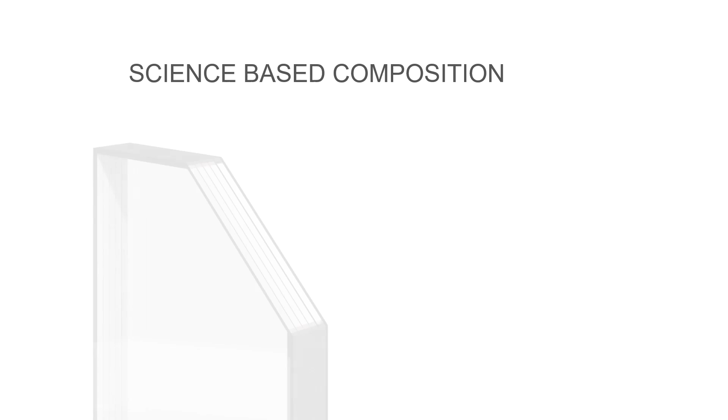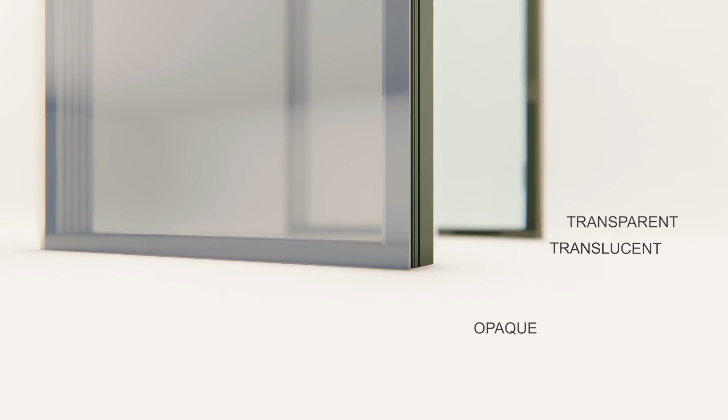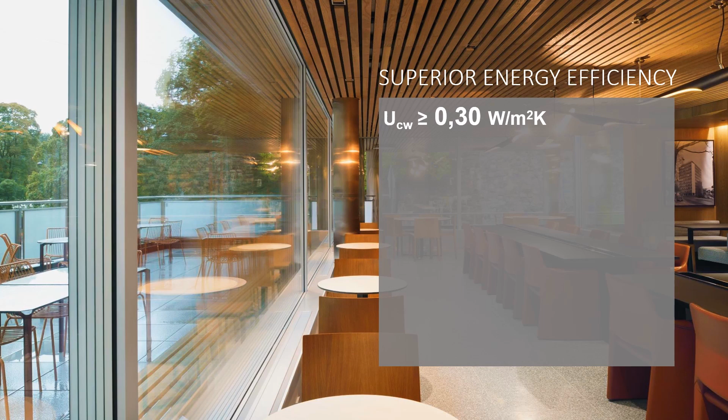Qbiss Air is a unique single-skin glass facade using a multi-chamber insulating system. Up to 6 layers of glass create an innovative insulating core which is available in transparent, translucent and opaque options. A unitized glass curtain wall system requires no exterior sun shadings. Qbiss Air delivers unparalleled energy savings. Specifically, the fully transparent glazed facade offers an extreme level of thermal insulation. Thermal transmittance or U value of curtain wall is as low as 0.30 watts per square meter Kelvin.

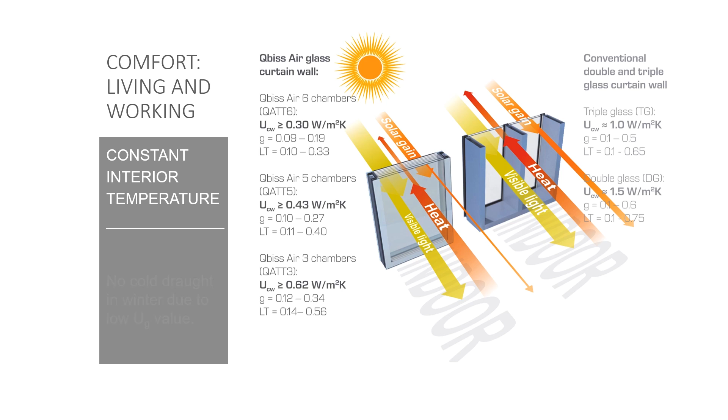It facilitates a constant interior temperature with no cold drafts from the glass in the winter, which is due to low thermal transmittance U value. Equally, in the summer, there is no excessive solar heat gain due to low solar heat gain coefficient. Qbiss Air creates an outstanding living and working environment. Due to no need for exterior sun shadings, there are no viewing obstructions to the external environment. The fully transparent facade maximizes the passage of natural daylight, which contributes to an improved well-being of occupants. Its sound insulating capabilities in excess of 43 decibels ensures a peaceful environment too.

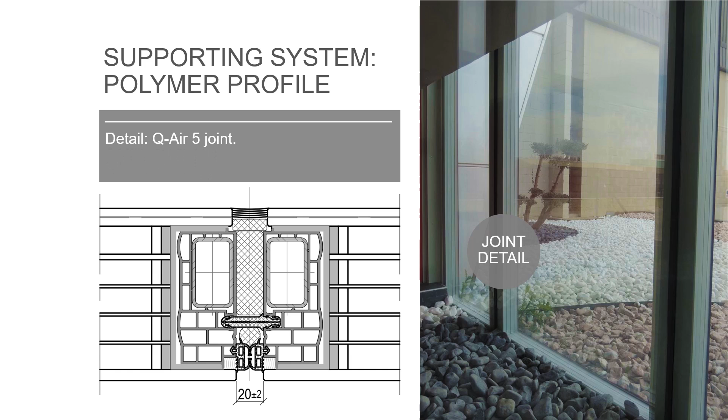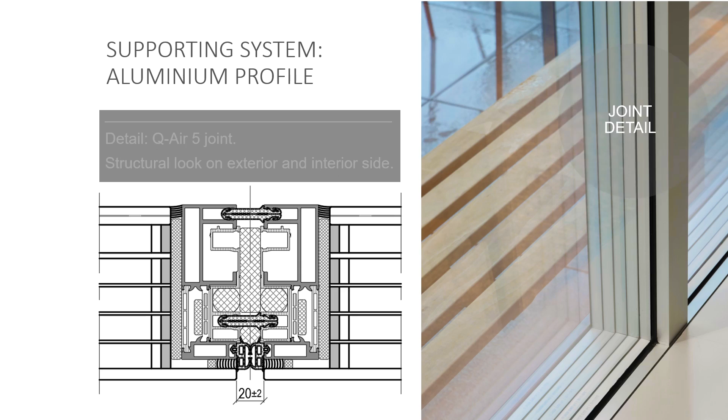Qbiss Air curtain wall offers 2 structural supporting system options, a polymer extrusion profile and an aluminum extrusion profile. Polymer extrusion profile is a perfect choice for achieving the demanding thermal insulation levels for the building envelope. The integrated profile enables flush exterior and interior look. Aluminum extrusion profile, on the other hand, enables different combinations and integrations where transparent, translucent and opaque units can be combined or windows and doors can be integrated into a unit.

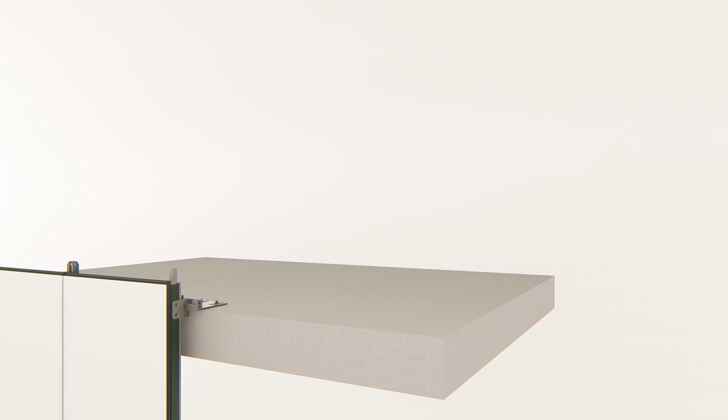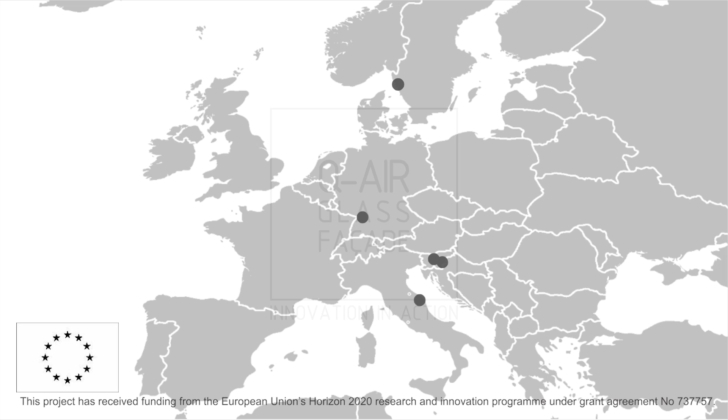Q-Air is designed for fast, clean and efficient floor-to-floor installation. Based on proven modular unitized principles, each unit is installed from inside the building, eliminating the need for external access. For refurbishment projects, Q-Air elements can be installed from the outside of the building in order to assure no interruption to occupants in their daily activities. Due to high level of innovativeness and positive impacts, Q-Air has been selected and supported by the Horizon 2020 program, a fast track to innovation pilot scheme. Q-Air project is implemented by 5 international consortium partners: Trimo and Zag Institute from Slovenia, Kohlbecker from Germany, Cantori from Italy, and Skandinaviska Glass System from Sweden.

At the end, I would like to invite you to our architectural competition, Q-Air Point. Use the Q-Air BIM library to design a pavilion where people can meet, work, or simply chill. Submission deadline is on the 15th of October 2018. You can get more information on www.q-aircompetition.com. Thank you all for watching, and now I give the word to my colleague Mate in Munich to talk more about BIM.

Thank you very much, Mojca, for your nice video. And now let's jump in with the library itself. So we made it with Revit. And first, a little bit of theory. I prepared a few slides for you guys. This is standard information about BIM. That's the life cycle of BIM. I hope you guys are familiar with it. The main goal with this library was to create something not only for the architects, but to try to push the boundaries of these different phases of the life cycle.

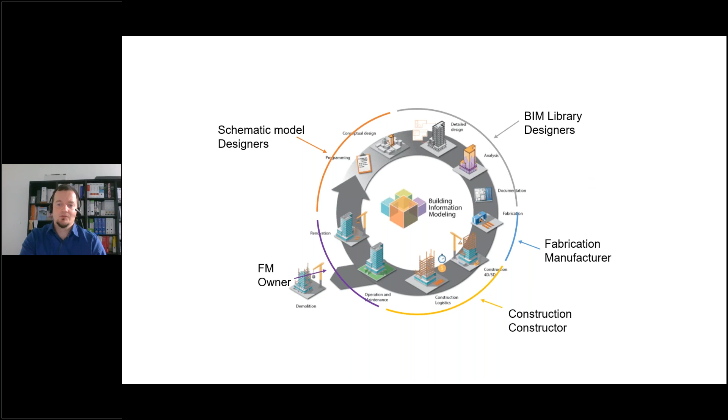In other words, it means a better collaboration between the architects, the manufacturer, construction, and also facility management. The structure of the objects in the library that enables this close collaboration is that we optimized the size of the objects, which means the 3D model is not that detailed. So we kept the performance the highest, so the computer is not going to crash under the 3D models. But we have the details, so you can use also scale 1 to 10.

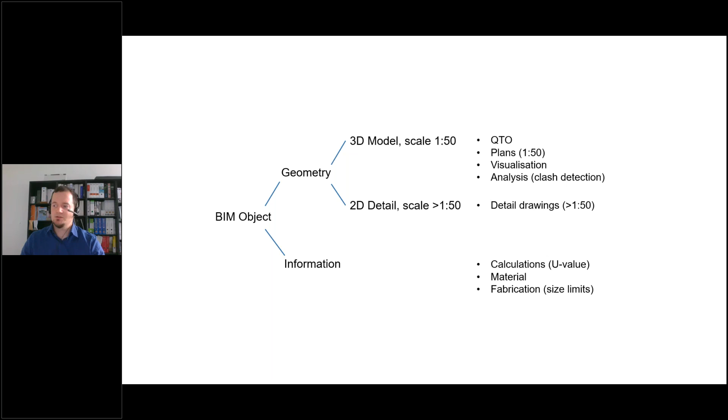But then with a smart solution, we solved to put the 2D details on top of the 3D model. Then, of course, we are talking about BIM objects, so there is added information for these Q-Air elements like sound insulation, fire protection, and so on.

And this is actually the starting screen. So if you open the library, this is the first thing you see. The first information here on the top left corner is Trimo. This is the technical support, the email address of the technical support. I will refer to it later when we have questions or something, then this is what we can use.

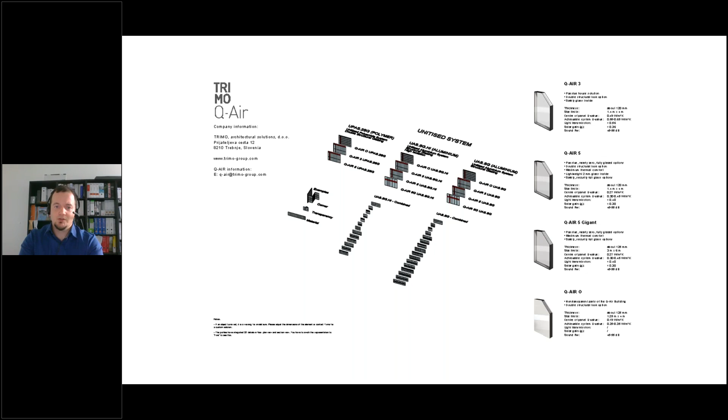On the right hand side, you see the 4 main types of this Q-Air element. Here on the bottom left corner, you see notes, actually standard information about using the library. And here's the library itself in 3D view. We decided not to create a library with several Revit families because we found it better if we put everything together in a Revit project. Here's the reason why. Here are the main benefits of it.

First of all, you don't have to install anything. I'm not sure if you guys have administrator rights on your computer or not, or are you allowed to install anything, any plugin on your Revit? We make sure you don't have to. You just download this Revit project, open with your Revit, and you can already use the library. So no installation. Easy upgrade means that we created the library in Revit 2015. So whatever you use, 16, 17, and so on version, you just have to upgrade the library once, and then you can already use it.

The good overview means that if we keep going on with the separate families, your only option is to see the name of the different panels, and unless you're a Trimo expert, I'm not sure if you would find what you're looking for. But if you're working in a project, then you see this is an opaque element, that's a transparent one, then a semi-transparent one, and so on. So visually, it's easier to find what you're looking for.

Then prepared materials means we have the most commonly used materials here. I'm not saying you cannot use anything else. You can use every kind of colors, and maybe you will get an answer from Trimo that no, it's not possible to use it. But these are the ones which are included in the library. These are validated from Trimo that most customers ask for these materials.

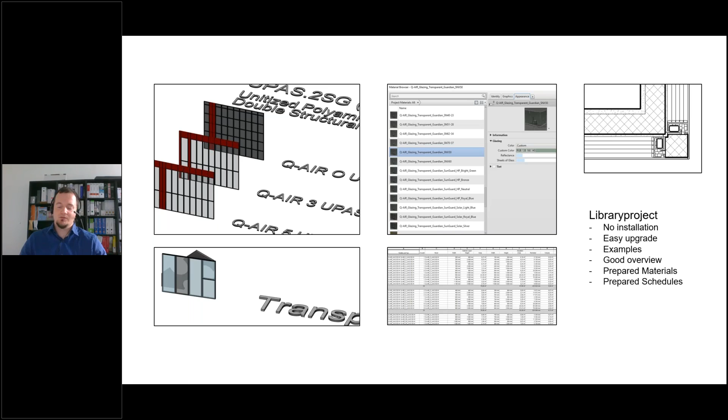Then prepared schedules, detailed schedules. You cannot add detailed schedules to a family. That's also an advantage of this solution, that we put everything together in a library project.

Here's how you can use the library. At the moment, it's available on the site of the competition. Later on, it's going to be probably available on BIM Object and also somewhere else on the Trimo website. But as of now, that's the place you can search for it. You just have to scroll down to the end of this competition site, and there's going to be a link here. You can download the Revit library.

As an example, I just opened it on my left-hand side here on the screen, and on the right side, I just opened an empty template, a new project. It can be also an existing project. This project is already done. I just want to have a look at it, how it would look with the Trimo Q-Air product, and then I can copy paste the elements from the library into my existing project as well.

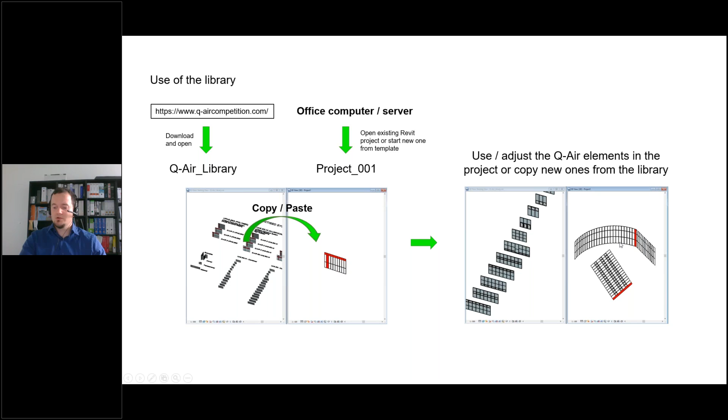So now I just used an empty project, copy pasted it, then I'm safe to delete this element from here, because the families are already loaded into my project. We will see it live in Revit, and yeah, then you're good to go. You can model whatever you wish with this type of curtain panel.

And now I mentioned curtain panel because we are working with the curtain system, and not in the traditional Revit way that we have curtain panels and curtain mullions, but we only have curtain panels because Mojca said it in the video already, that this is a prefabricated element. So the frame goes together with the glazing itself. This is how in 3D it looks like with less detail, and this is how it looks in floor plan and section.

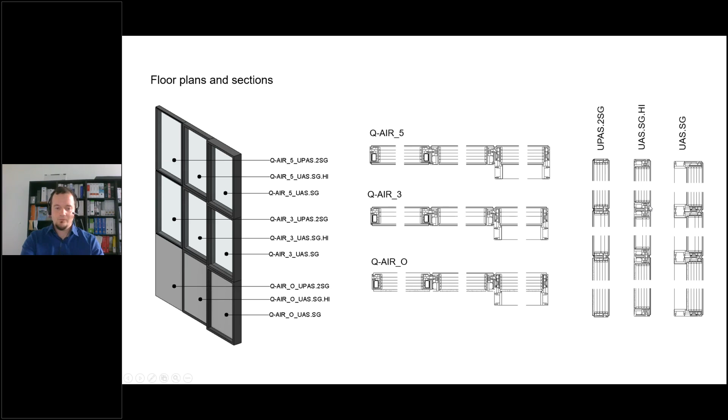Now about this panel, how it works. The panel has a profile and a core. We have 3 different profiles. It's just a repetition about what Moitza said, but in practice how it works. So this is the first one, that's the polymer profile, then the first aluminum profile, then the second aluminum profile.

And as of the cores, we also have 3 different types. First of all, the opaque version that has a gypsum board as interior layer. Then we have a transparent version, that's the number 3 with 3 chambers, and also a transparent version with 5 different chambers here as insulation. The core means, by the way, the interior layer, the exterior layer, and the insulation in between.

And you can combine these 2. So you can use, for example, with this polymer profile, you can use this Q-AIR 5 as well. You don't have to combine it. I already combined it. That's why we use this library, because everything is prepared there. As of the information, these are really just a few examples of what's included in the library as information.

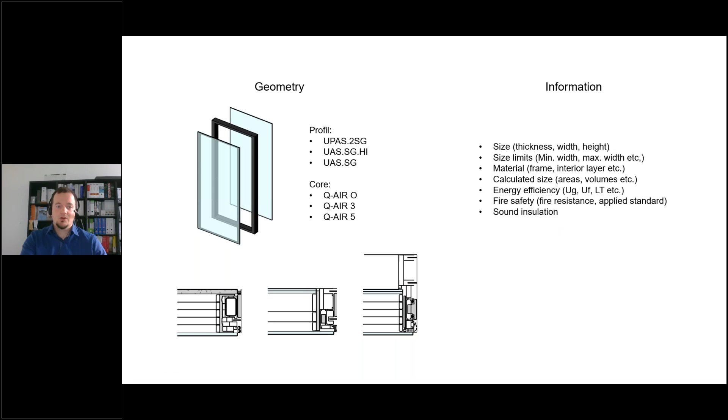Okay, now let's go for the features of the library. This is how we solved the problem of the detail. So to keep the file size at the minimum and give you guys the maximum detail. In 3D, it looks pretty simple. If you make a horizontal or vertical cut, it's still pretty simple.

And immediately, if you switch the detail level to fine, then these blue ones are going to appear. These are the 2D details. Until this, it's for 1 to 50. From now on, it's 1 to 10. It's just another add-on that we left the exterior layer and the interior layer visible from the 3D geometry.

The background is, here's an example, the corners. In this case, for example, this is the exterior, that's the interior, this is the wall itself, and you have to create here an overhang. So you have to go further with the exterior layer. And once you go further with the exterior layer, you also want to see it in 3D, not just in 2D. That's why the 3D object is here visible.

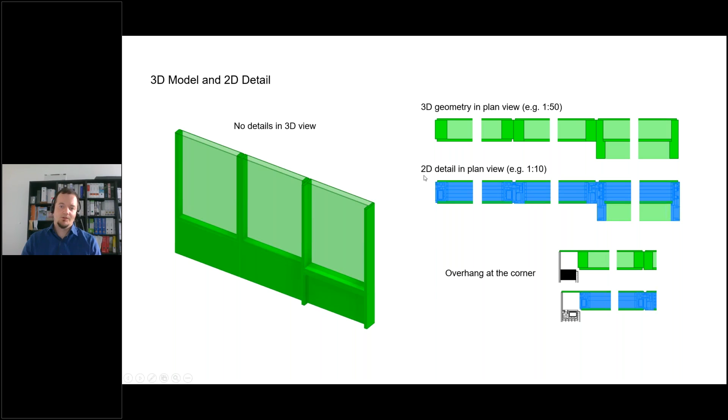Then more features here. Size limit. In similar libraries, you would see as type parameter that the size limit is maximum 1 meter for this kind of panel, for example. Here, from this close collaboration between architects and the manufacturer, we figured out that actually the size limit is defined by the size of the glazing, of the glass.

For this particular example here, the glass has different sizes. The insulation uses a size from here, from the interior side of the frame to the other side of the frame, so it's shorter, narrower. The exterior layer is much bigger. So if you want to create like a minimum maximum width, you really have to think about it, that at the minimum I have to consider the smallest one, at the maximum I have to consider the biggest one.

You don't have to do this calculation. The library or the families do these calculations for you. And if you happen to choose an invalid size, then the panel is going to turn red. So simple. You have then two options. One of them, change your design.

Don't do things like 50 centimeter wide elements because it's too small, and don't do 4 meter wide elements because that's going to be definitely too big. So one solution is to change your design. The other one is to contact Trimo technical support that I showed you, and I'm going to show you again once we are live in Revit.

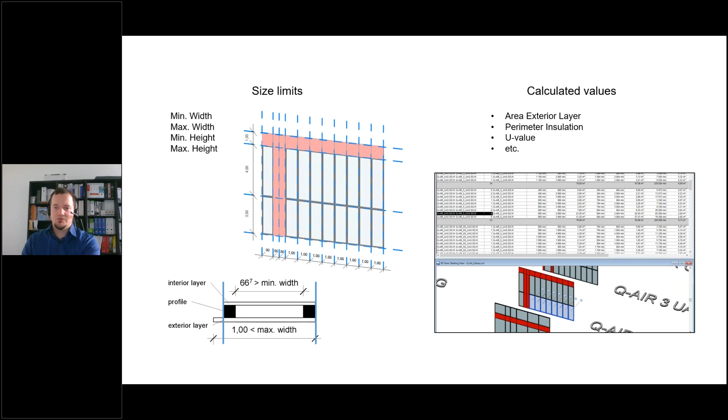Okay, one more feature. One more feature is the combined panels. It looks like this. In this case, the prefabricated element is not just a single panel, but it has two interior frames added to it. So what you prepare in your curtain system is these green lines. That's where your grid goes, and as a type parameter you can define the size of the window, which will define the positions of the interior frames. It's pretty useful once you have a facade with this kind of pattern, so you don't have to use hundreds of panels. You just have to use 30s of panels.

Another feature, I'm not going to talk much about that, the 2D details. You can play with the 2D details. I didn't hide it in the library. It's available. You can define what you want to see in detailed fine representation, section or plan view, floor plan view. In the library, everything is prepared, so you don't have to play with it. It's just there as an option.

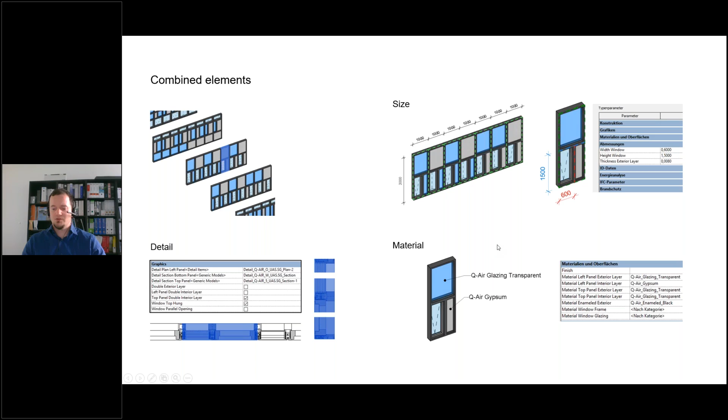About the materials, for example, in this case, you can change the color and the material separately for this panel, the other panel, for the frame of the window, and so on. And this was about the theory. And now let's go on for the practical side of the library. Yeah, we still have time.

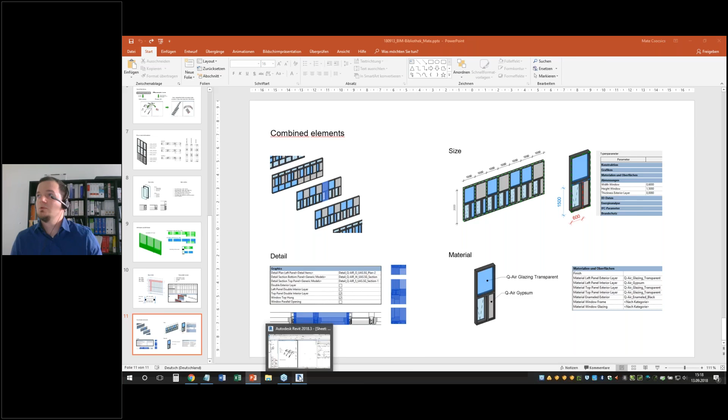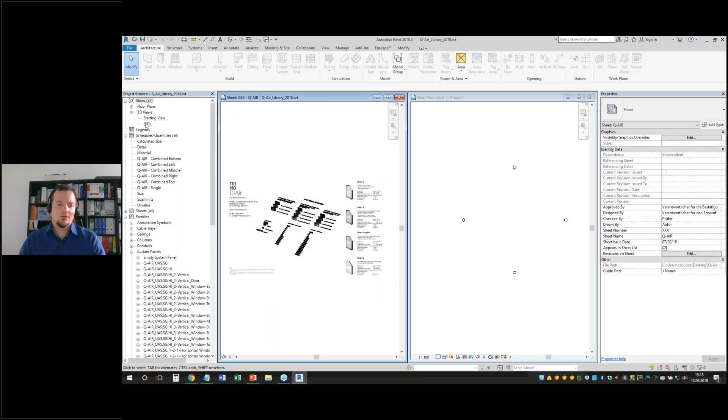Okay. This is the starting screen. I work with 2018.3, but I just upgraded the 2015 version of this library, obviously. This is the default metric template from Autodesk. I didn't use any feature. Now I just want to select here the right panel for my project. And here I have to mention, this is again the technical support. So it's already on the starting screen. If you get stuck or your elements are red and you don't want to change your design, then this is where you can contact. Now I'm going to go in a 3D view and I'm just going to search for the right element for my project.

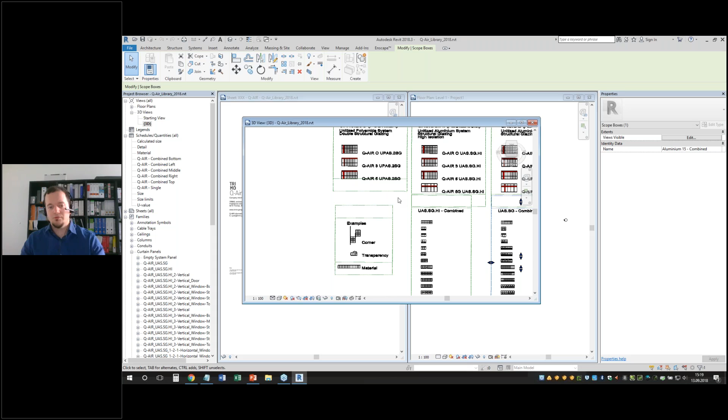All of these elements are called unitized system. It's organized, first of all, by frame. So that's the polymer one. That's the aluminum first. That's the aluminum second. And here are the combined elements for the aluminum first and the aluminum second. For the polymer, there are no combined elements, so it's not like a combination of an opaque panel with a window. It's not available for polymer profile. But instead here, we place some examples how you really can do the corner or transparency or different kinds of materials. In realistic view, you see the different colors. These are the most commonly used.

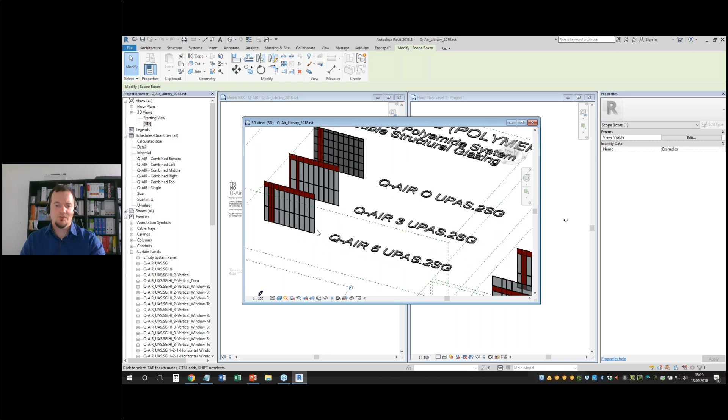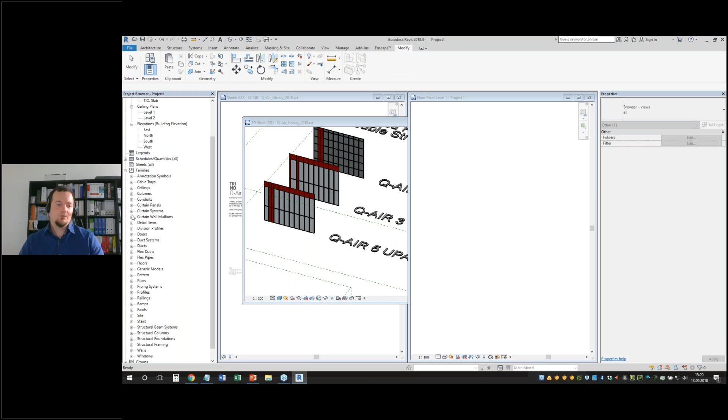I'm just going to go for the polymer profile. And for the higher performance, I would select the 5-chamber one. I'm just going to hit copy, go to my empty template, modify and paste. It's a notification that it's not going to overwrite anything in my empty template. That's good. After a few seconds, I already placed my first wall, and I can already delete it. I don't need that wall in my project, and the family that I wanted to import is already there. If I open these curtain panels, it's there. That's what I wanted to have. That's this panel.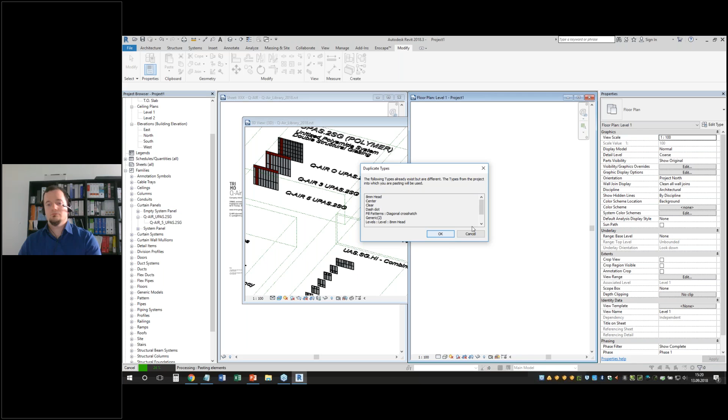And now I'm not done yet with my library. I also need a combined element. Don't worry, it's not a polymer profile, because this kind of aluminum profile can work pretty well together with the polymer one. And then I'm going to paste this one as well, the notification again that I can just ignore. Paste it, delete it. It's also there. Two vertical means two elements are vertically combined with each other. And this means it's a 3-chamber one with a window, 5-chamber transparent with a window, and an opaque version with a window. That's just about the naming convention. Then I'm going to create an architectural wall here in my empty project. It's going to be actually a curtain wall.

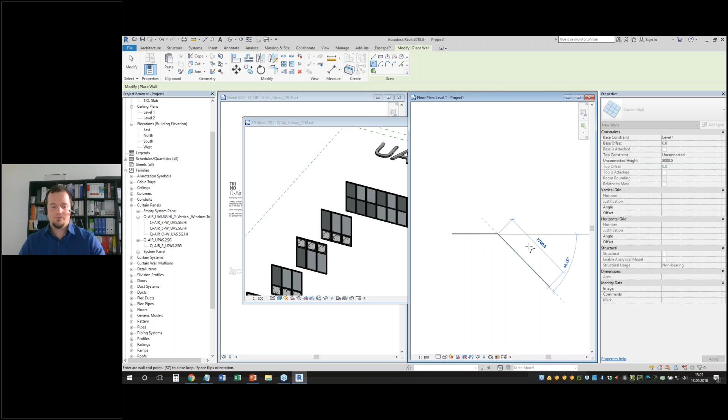Not too big, just like that. And the curved curtain wall. All right. I don't need my library actually anymore, so I can just minimize it. Maybe later I'm going to load something else from it. And let's see my empty template. A little better consistent view. This is in floor plan. This is the other one.

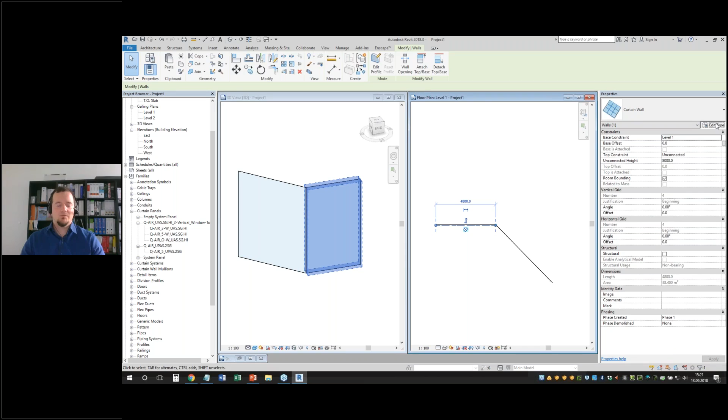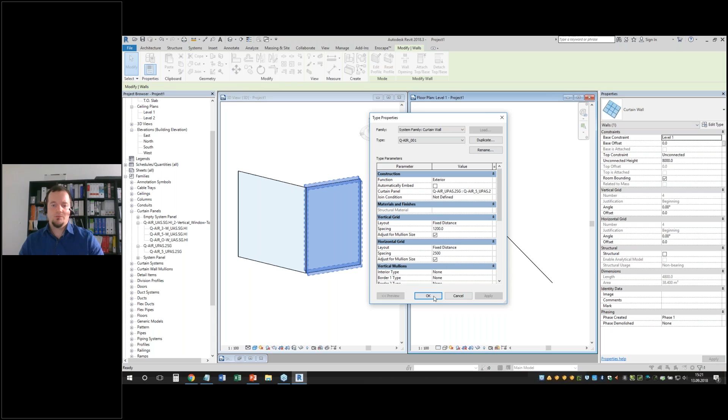I didn't define yet that it's going to be actually a Q-AIR panel, so I have to duplicate my type, and I'm going to call it Q-AIR_001 just for my information. Curtain panel is going to be, search for the Q-AIR that I just loaded in. That's the panel that I need. Layout is fixed distance, 1200 millimeters. The horizontal layout is going to be fixed distance, 2500 millimeters. And that's it. That's how it looks like.

Okay, I made it too accurate actually. I wanted to show how it turns red. So I'm just going to make it a little shorter, a little longer. That's how it turns red when you get an invalid size. Of course, now it works just like any other curtain system. So I just changed it, not from the beginning, but from the end. Then it looks like this.

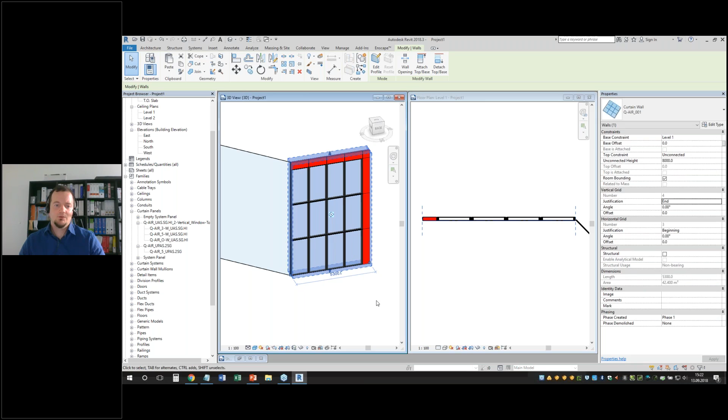I can do the same with this curved one. I just select my type and I say Q-AIR_001. That's what I selected. And it looks like that. And now I'm going to change some of these panels. No, actually just this one panel, this one particular panel. I'm going to change it for the window one just to show you how easy it is.

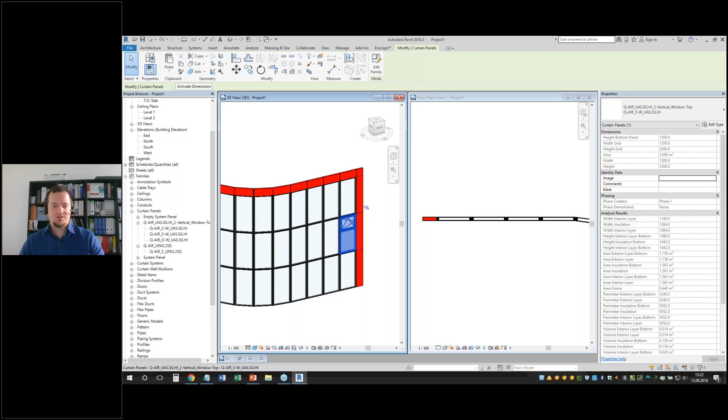So it's going to be a 5-chamber panel combined with a window. That's how it is. Or I can select the opaque with a window. That's how it is. Of course, this would turn red immediately if the size of this lower panel, the bottom panel, is too small, for example.

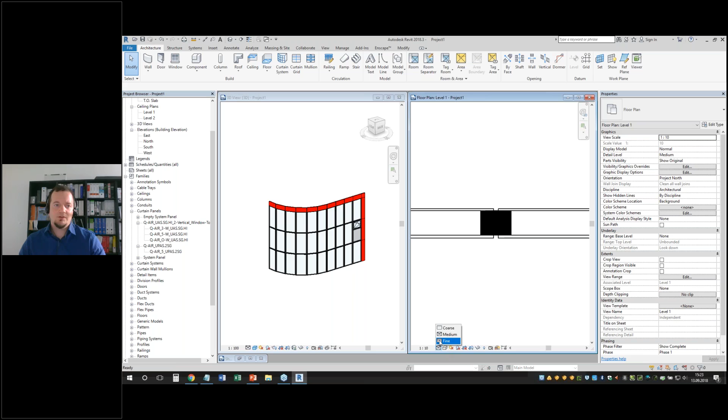And then I wanted to show you, this is how it looks in 1 to 100, 1 to 50, and 1 to 10. In 1 to 10, I see it's not enough detail. So I'm going to turn on the fine, and this is the 2D detail that I was talking about. This is the 3D geometry, and this is the 2D detail. Now we have here a gap of approximately 20 millimeters. And here we have approximately more, 5 centimeters. And that's why I'm going to change these panels.

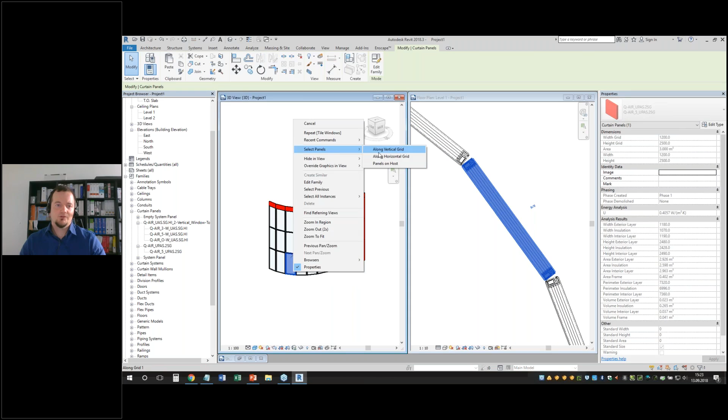I'm just going to select this one, select all of them on the vertical grid, unlock them, and I'm going to change this type, duplicate, and I will give it a curved version. Yeah. And I will change the overhang at the corners. I already talked about this overhang. This overhang means the overhang of the exterior layer. Now it was -1 centimeter. That's why from the two panels we get 20 millimeters.

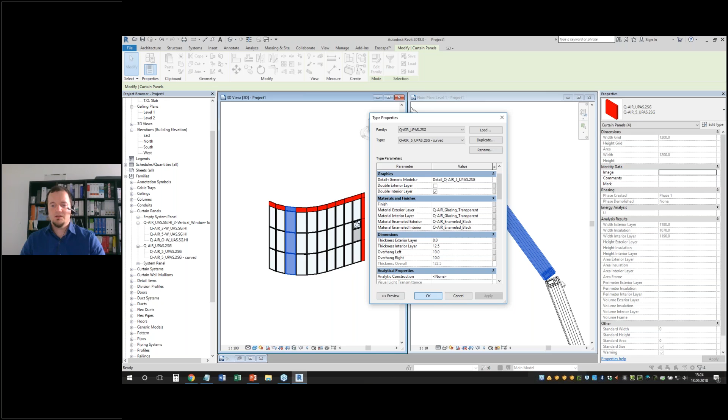Now I'm going to make it plus 10 millimeters, plus 10 millimeters. And then this is how it looks. So this one here is with -10 millimeters. This one is with plus 10 millimeters. And now I'm going to select this one, along vertical grid, unlock them, and I will change the curved version. Now it's approximately 2 centimeters, the gap here as well.

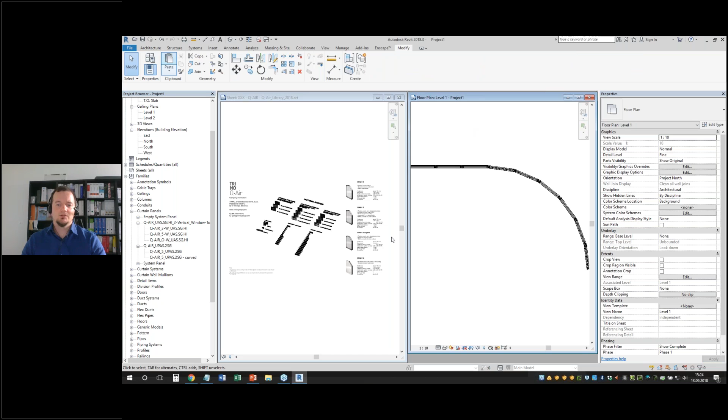Okay, now I need a quantity takeoff. That's the last thing I want to show you today. I opened up the library again, and I'm just going to copy my Q-AIR single quantity takeoff, and I'm just going to paste it in my project. Modify and paste, ignore the notification. Here it is, I can close my library. Here is how it looks. I close the floor plan view. So this is the 3D view, and this is my quantity takeoff.

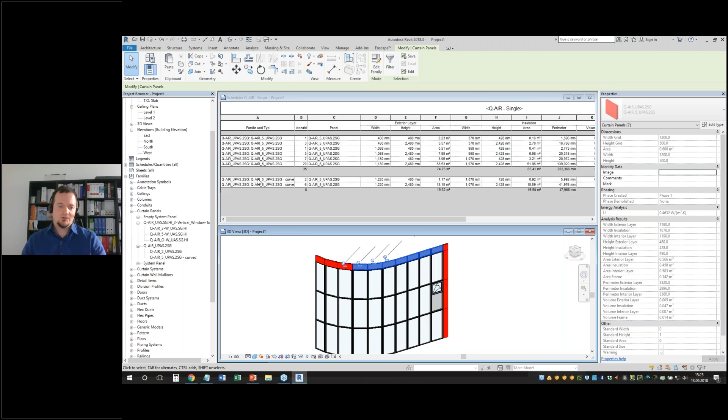And I know already I have 7 pieces of this kind of element, where the exterior layer has this width, this height, this area, insulation, this perimeter, this frame, and so on. I can see the same for the curved ones. I have 6 pieces of this one, and this information is for the manufacturing. That's what I wanted to show.

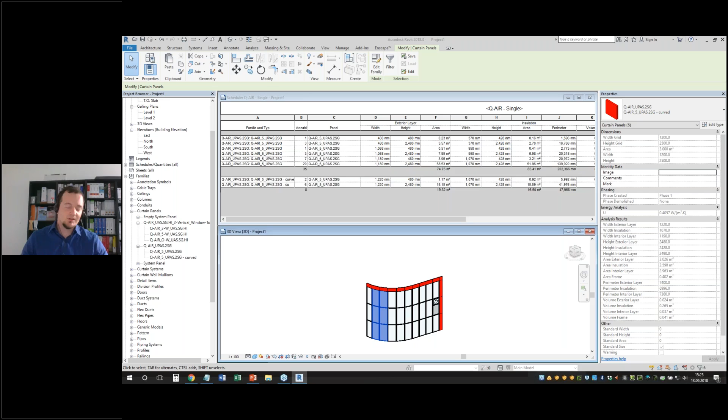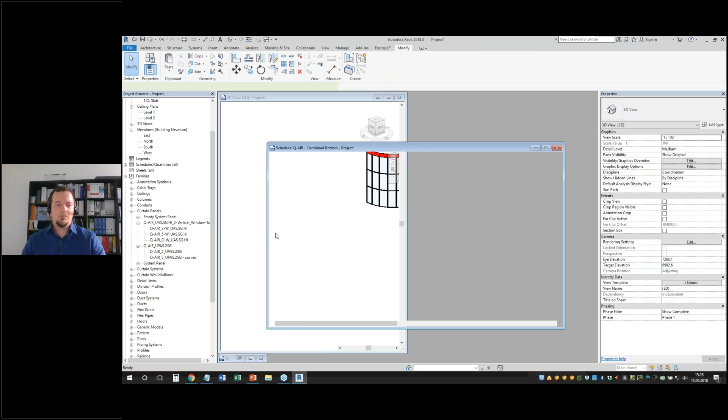So then I will show you how to make the quantity takeoff for the combined panels. I'm just going to copy paste the combined panel bottom 1. Control C also works, of course, and then Control V. And it's here. I only have one bottom panel with a combined element, and that's here.

Of course, we are talking about BIM, we are talking about Revit. So immediately if I select the second one, unlock it, and I say this is going to be also an upper combined element, then here you go. You already have 2 of them. Yeah, that's right.